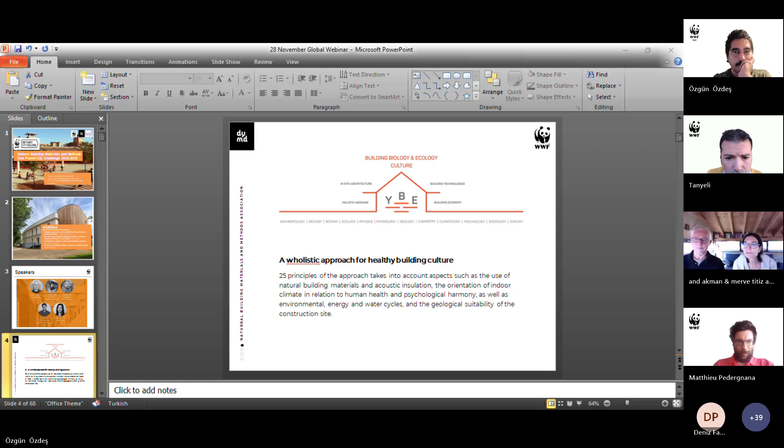Can we go to the next slides? I think we skipped some slides. Just a second, I need to reshare my screen due to a technical problem. So sorry about that. I need to try another plan. No problem. I'm a bit stressed because of the time. For some reason, the Teams... Now it's full screen. Perfect. Okay, nice. Thank you very much. Can we go back 2 slides or one more? One more. I think 2 more. I think slides earlier.

No. We should go backwards. Okay. To the beginning. To the beginning.

Okay, here is okay. So 10 years ago, we founded the institute, but as I said, during our awareness-raising campaigns, we also understood that without natural building materials, we cannot do too much. So we need some kind of a working group. We started in 2018, and we started to meet every month for 3.5 years.

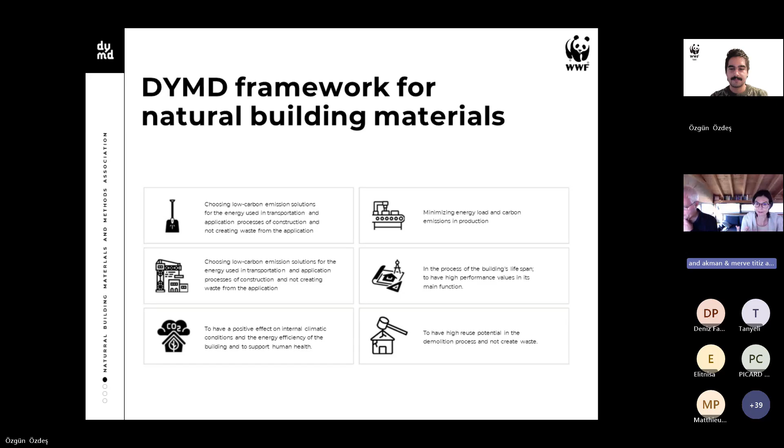And very important also, first, as much as possible, they shouldn't create any waste. But if so, they should be directly turned into another material. Their recyclability should be very high.

Next slide. So the association's main goals are first to develop expertise and know-how, with trainings and workshops. Mostly we choose to create applied workshops, but surely theoretical knowledge is also important, and we should try to spread it. The standards are very important too. Arndt and Matthieu will also talk a bit about it.

Surely our industry on natural building materials is also developing in Turkey, but the standards are important, so we try to disseminate them. For the last 4 years, we now have more than 60 members. We already made 18 webinars, several meetings, workshops and technical trips.

Next slides. Last week we had the Natural Building Biology Forum, and for the third time we are the main partner as the association. It's kind of a meeting point for natural healthy buildings. We have an exhibition which is developing every year. Now we have many prototypes inside.

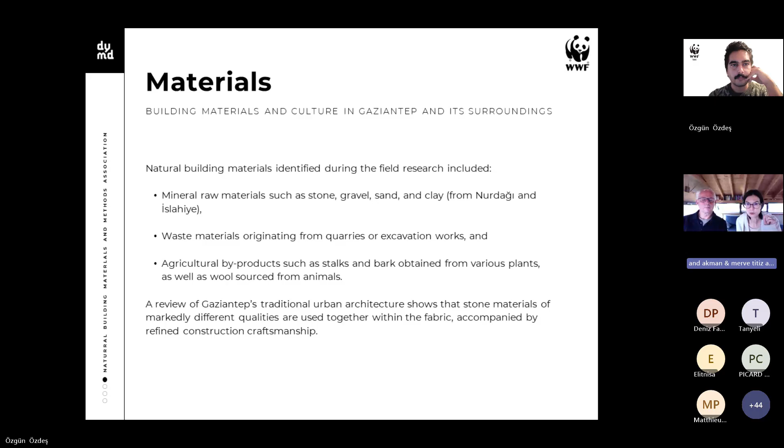Waste materials originating from quarries or excavation sites could be a potential for the area. Agricultural byproducts such as stalks and bark, but also reed marsh near Adıyaman, could be used as raw materials. Also, there were forest areas in Kahramanmaraş and partly in the Hatay region. You can check the report on the WWF website as a PDF. I can also generally talk about some outputs of our report in the next slide.

So especially in our literature review, we try to really ground our argumentation with scientific knowledge and referenced knowledge. And there also we saw, and Arndt will talk more about environmental performance, that natural building materials have minimal, even negative CO2 emissions most of the time, whereas conventional products are significantly higher in this sense. Exploring the local potential of natural building materials and promoting their use will accelerate the sustainable transformation of the built environment, and we think it will enable the creation of disaster-resilient living.

This study also highlights the importance of both industrial production of natural building materials and methods and their inclusion in regulations and zoning plans. But in order to really be integrated more in the regulations, we need more research fields so that the information becomes more regional-centric and more in situ, I would say. So in this context, cooperation with central and local authorities is very, very important.

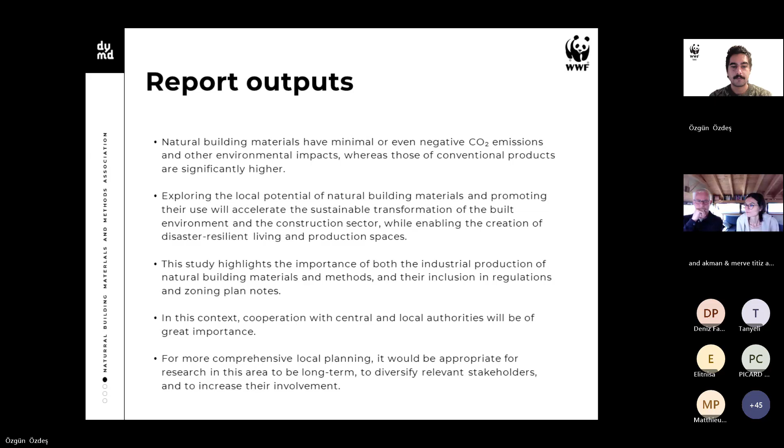So I will go on now with the environmental performance of these natural building materials, and there are some comparisons on this slide and the next slide. We don't have the time to fill you up with 100,000 data points now, so it's more generalized. So first, talking about the low ecological footprint, and the ecological footprint is the CO2 emissions, but also the low embedded energy for producing them.

So you can see here the differences between glulam, lumber, steel, concrete, clay, etc. We could add a lot of other materials, but for example, here you see that steel is very high, but aluminium, also a very much used building material for facades and windows and frames mostly, has on average 3 times higher embedded energy usage in production than steel. So that's very important, and here we see how the natural building materials are at the low level.

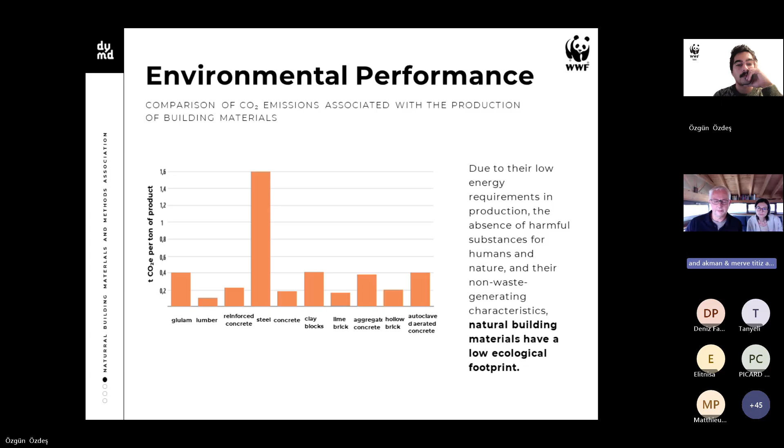Next, please. Thank you. And here again, a comparison between the thickness and the emission. So the red points are the emissions, and XPS or aerogel panels, for example, have more emissions according to their thickness, as we see. Then some are in between, but hemp fiber board and straw bale are important because they are in the minus here. So it's more valuable to have the emissions at a minus level.

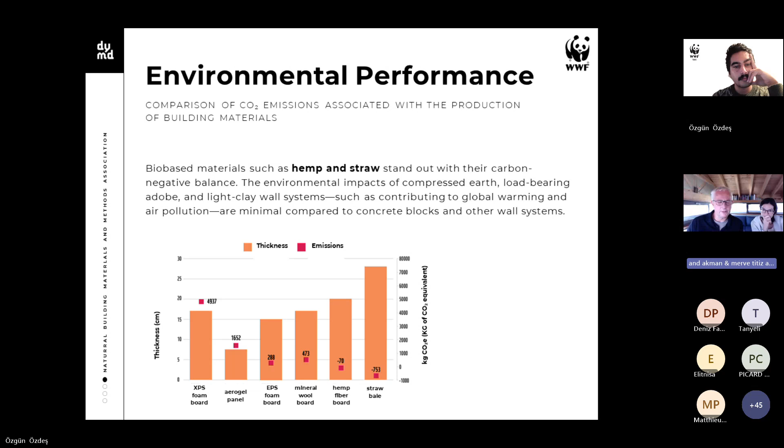Next, please. So talking a bit about the diversity of natural building materials. In the last 15, 10, 5 years, we have had a real rebirth or renaissance of these natural building materials, because they are more and more produced industrially and with standards. So here are some examples, also in the middle, for example, acoustic panels. We can build them with natural building materials, and the raw material is again wood fiber, for example, or we can use waste paper, things like that.

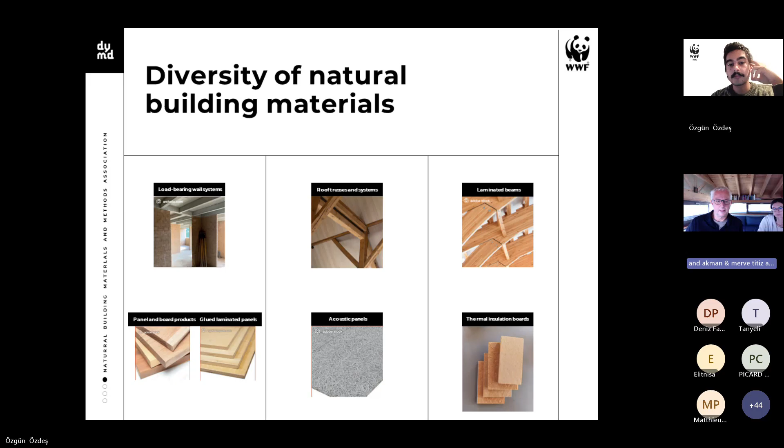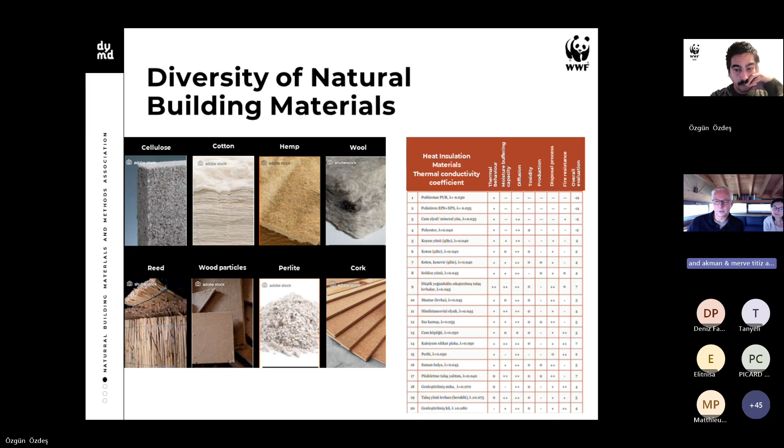Also here, reed on the left side, thank you, is the insulation material which uses the lowest energy to produce. And for that, we have very big potential in Turkey, for example, to produce reed, and it can be turned into a big economy also. Next, please. Thank you.

So there are rammed earth walls. Rammed earth walls are not coming from tradition, because we need very strong mold plates, which we didn't have in the past, but now we have them. And we have the technology to compress them. So that's why rammed earth technology is growing more and more.

Clay plasters, clay panels or clay paints are produced in Europe, also in France, but more and more also in Turkey now. And the Natural Building Materials and Methods Association is in cooperation with these startup producers, also on standards, so that they can develop their products close to, let's say, European standards.

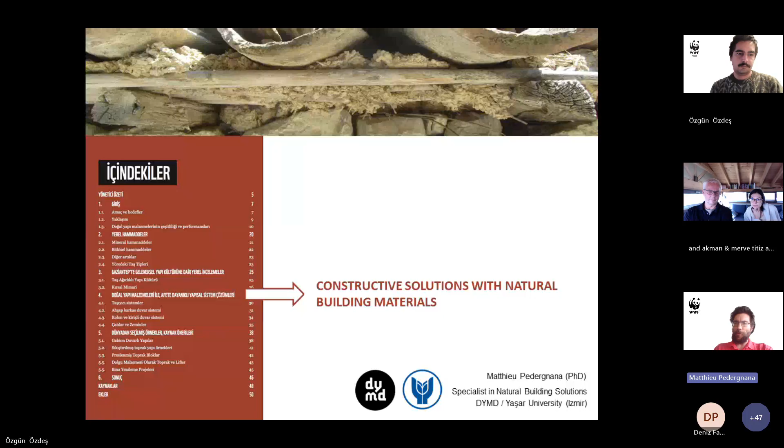The system and the work we identified were especially for structures in rural areas, not in cities, and therefore all the systems we identified were based on timber structure and not using any kind of reinforced concrete structure. However, all the solutions we are presenting would be suitable for it. So first, please, next slide, it was good.

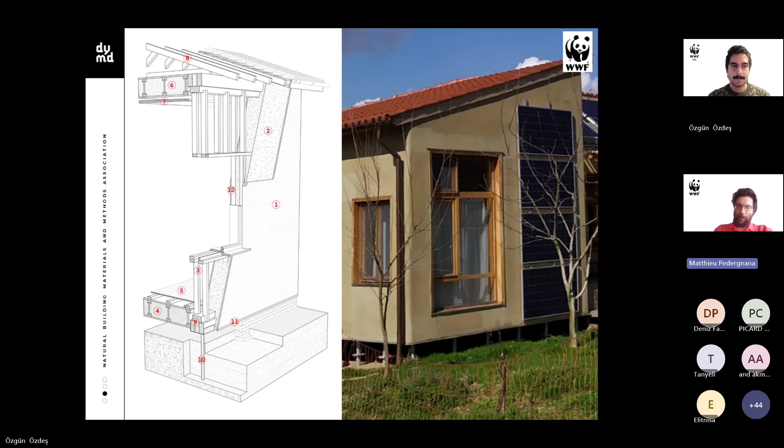I just wanted to show some examples of already existing buildings in Turkey that are using these materials, and we were inspired by those existing structures like this, a farm in the Tekirdağ region, in the northern region of Turkey, that is built out of light clay, a timber frame structure, and a light clay material that is creating a wall incorporating the timber structure, so creating a full insulation all around the building.

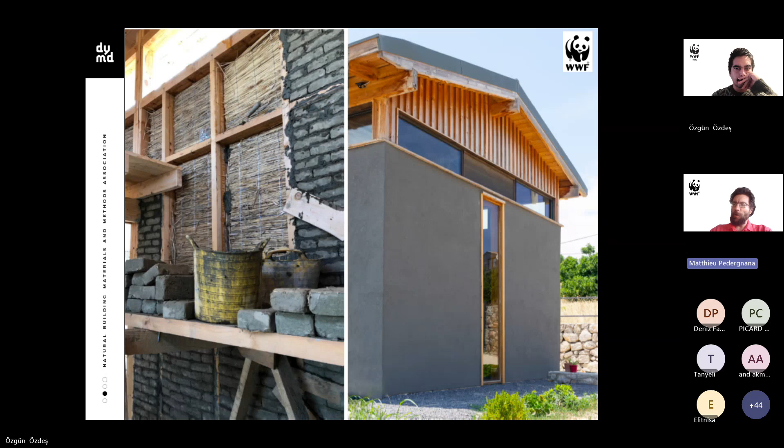Next slide, please. Or here, another building based again on a timber frame structure, but a totally different constructive solution where both insulating elements, such as clay panels and reed panels that we can see on the left side of the picture, and mud bricks are placed together in the timber frame, therefore both acting as insulation and thermal mass to regulate the temperature inside the building. This building is in a hotter region near Izmir. Please, next slide.

So the materials we identified that could be used are here, and we also have seen how they could be used. So not only the material itself, but the building technique and the system, and in which ways they could contribute to create a resilient building. And we evaluated, according to the literature and experience, their seismic resistance, flood resistance, fire resistance, or heat or cold wave resistance. That's this work.

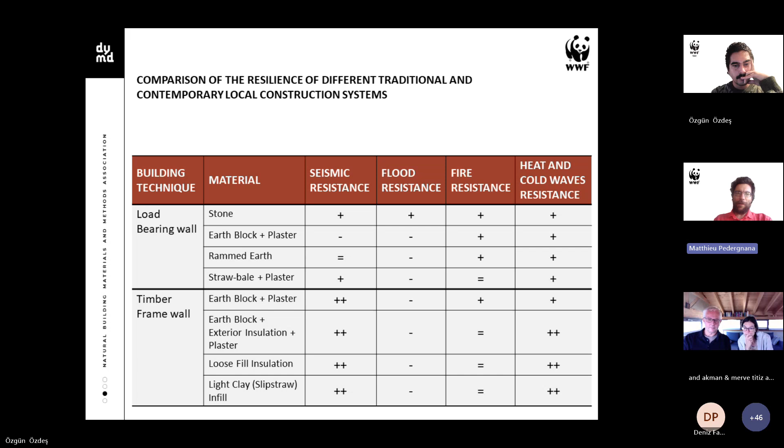And then for the work we presented, we decided to only work on timber framed walls, as most of the time, due to earthquake regulation, load-bearing walls are not allowed in Turkey anyway. Please, next slide.

So here you can see some 3D views of three types of timber frame wall with three different types of insulation. So it could be walls using heavy materials such as mud bricks or compressed blocks as an infill material, and it is especially suitable for buildings in a very hot region, as it was in Gaziantep.

But of course, the climate is not always the same, and the earthquake area was not only Gaziantep, it was also mountain areas with a much colder climate, and therefore we also identified solutions based on more insulating material, as solutions 2A and 2B. Those solutions are based on using more insulating material, less mass, especially on the exterior wall, and therefore creating a very good insulating skin all around the building.

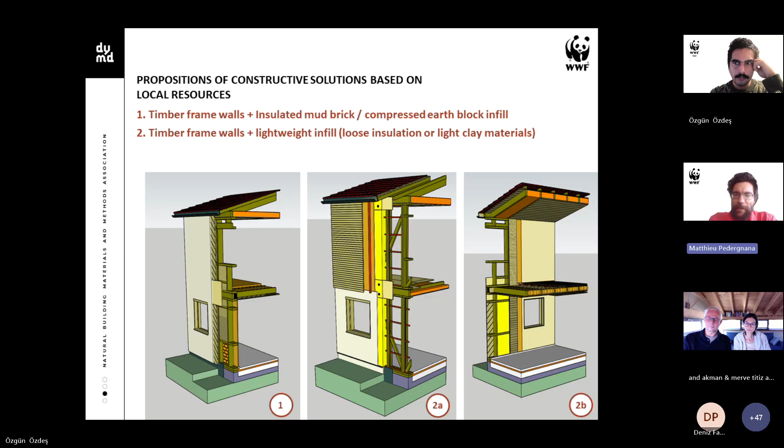So next slide, please. So here you can see in more detail the solution based on mud bricks. So the idea is, as we saw in the second picture of my presentation, to use a timber frame, and inside the timber frame to use insulating materials such as reed mats, and on the front of it place mud bricks. So it prevents the heat from entering the building, but at the same time we keep a high thermal mass, regulating the temperature and the humidity due to the quality of earth blocks.

This timber frame also needs additional elements in case of earthquake, and that's where you can see, from number 4, we have to add exterior panels or exterior bracing boards to prevent deformation in case of earthquake. So all these buildings and proposals are, of course, just possibilities. All of them need to be calculated. The dimensions of the timbers and insulation need to be calculated by an engineer according to local conditions. But these are possibilities to build, giving an idea of what can be done according to Turkish regulation.

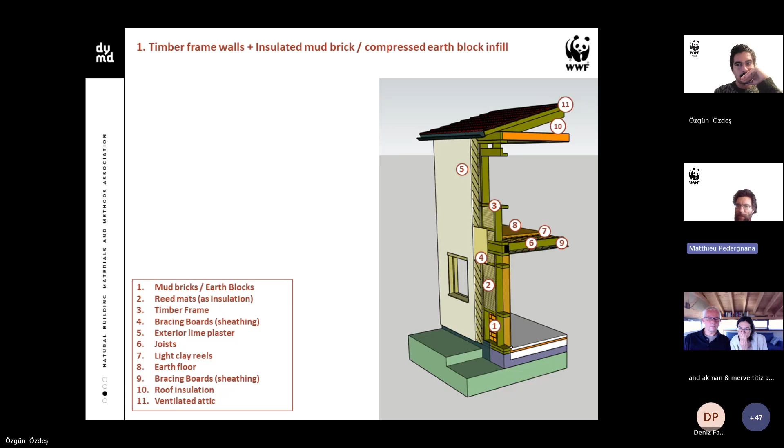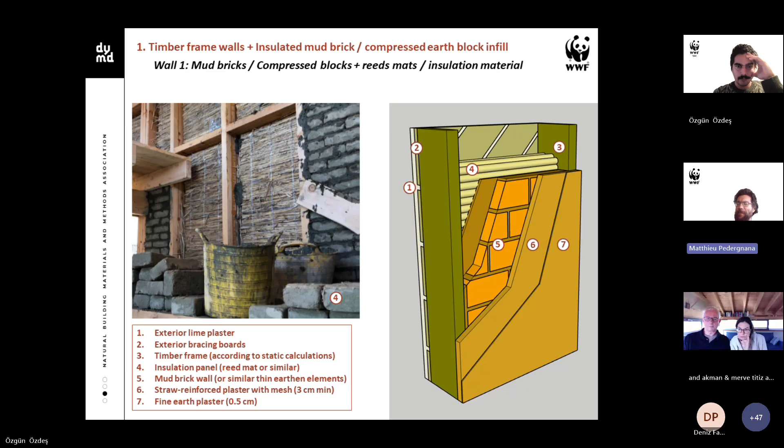Please, next slide. So here you can see the different possibilities while using heavy material inside the wall and having a lot of thermal mass. What I mean by thermal mass, for those who don't know, is using a heavy material, mostly earth, but it might also be stone. This material allows regulating the temperature by accumulating energy and preventing overheating inside the building. Therefore, this mass should not be in contact with any other heat source during the summer.

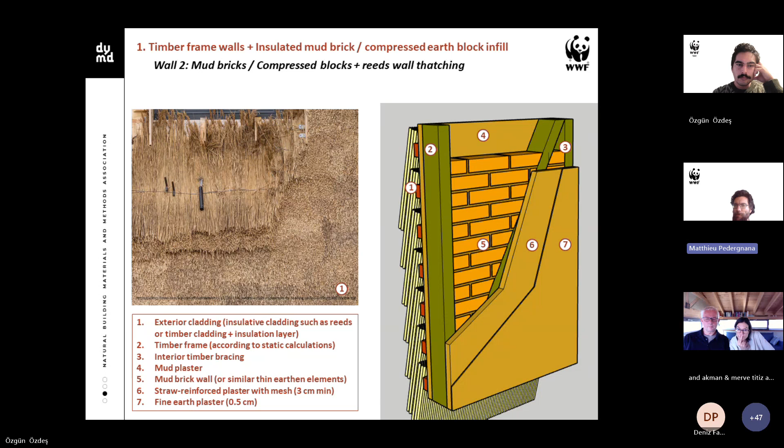Please, next slide. Another solution is to use reeds, not inside the frame, but as a cladding, as it has traditionally been used as a roofing material in several regions of Turkey or Europe, but now new techniques allow using these reeds as a cladding material. It's a waterproof material, and due to its thickness, it makes a very good insulation material. Please, next slide.

Or, of course, to keep bigger thermal mass, the reed panel can be used on the exterior of the frame, and then it also helps to support and hold the plaster, because it is a very good surface for it.

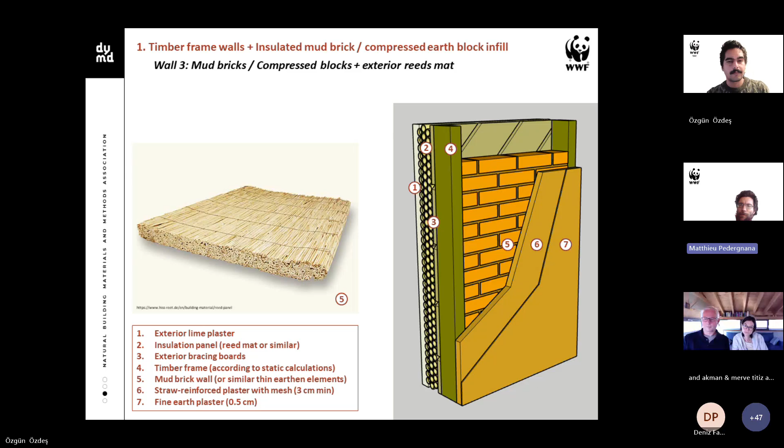Not only do we need to work on the systems that make the wall, but floors are extremely important, floors and roof. Here I'm presenting a technique called in English reels of earth, basically a mix of straw and earth used as some kind of sausages, placed in the roof or in the floor to add more mass. It has a disadvantage of adding mass to the building, but a very good advantage in that it can be used as heat insulation, sound insulation, and for storing heat to prevent overheating.

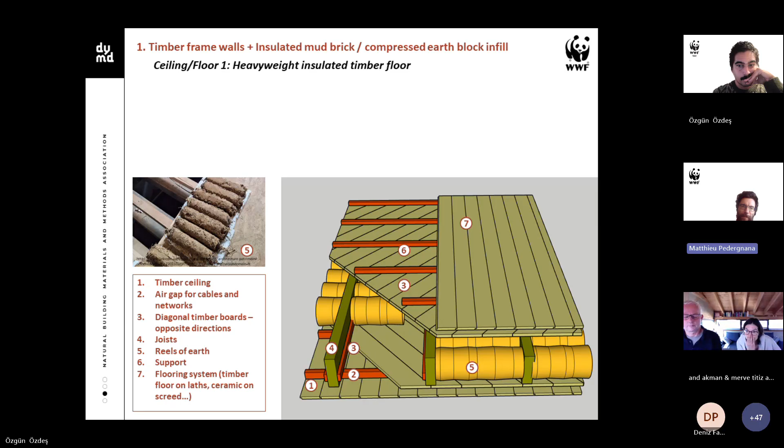Please, next slide. So here you can see the second type of technique. Number one is light clay, a material made out of a lot of fiber, using the clay, the earth, only as a binder. This kind of technique allows for very good distributed insulation all around the building. Here it's only used in the wall, but it can also be used as roof insulation in some cases. Please, next slide.

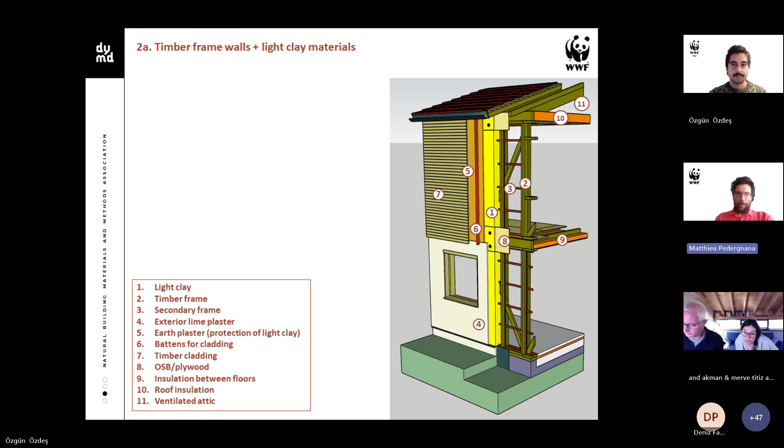While using this technique, because it is implemented directly on site, the bracing system can be integrated into the structure, coming back to a more conventional timber structure that carpenters know how to build traditionally. Light clay material can be made with a lot of different fibers. As you can see in the picture, this is an experiment with small buildings made with pine needles as fiber and a little bit of clay just to bind everything together. But a lot of other fibers have been experimented with, and from research I led at the university, at Yaşar University, the type of fiber doesn't impact the properties of the light clay, so there is no fiber that is better. This is a technique that can be very good because it can be implemented with whatever waste fiber, agricultural waste fiber, is available around.

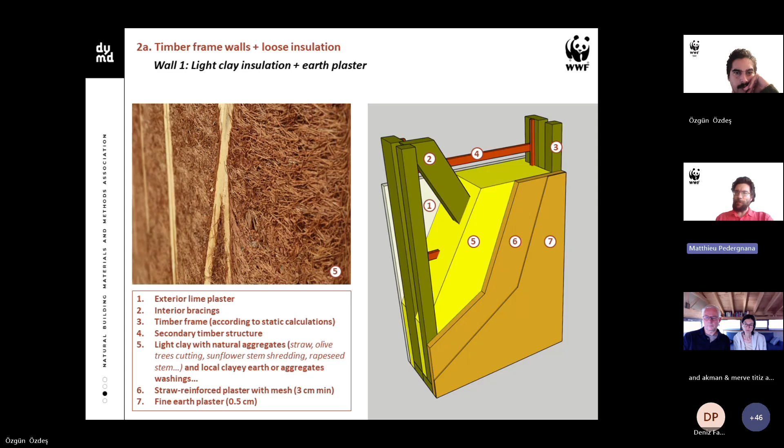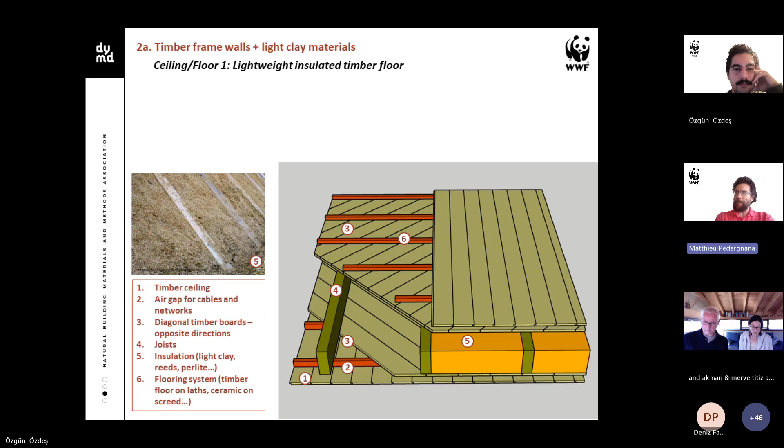Please, next slide. So again, here you can see in the floor, insulation can be poured in between the floor joists, since it will be closed on the bottom and on top using diagonal boards or plywood or any very resistant material. This creates boxes, and so any type of insulation can be poured in, such as light clay, reed pieces, or rice husk pieces, depending again on the availability of agricultural waste. Next slide.

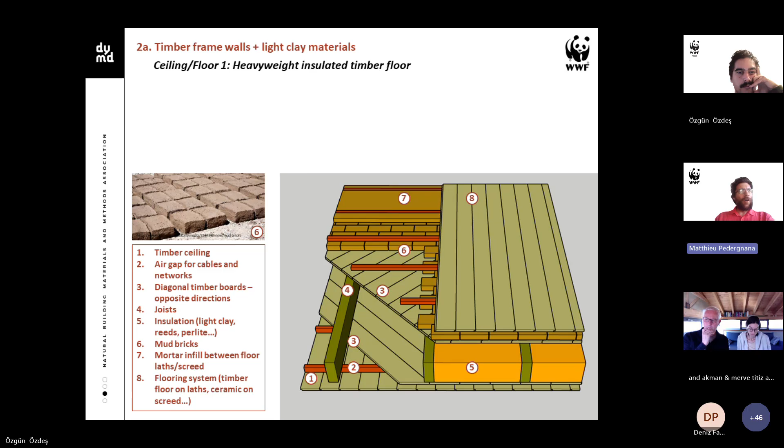In some cases, it can be important to add a bit of weight to the floor, for sound insulation or fire protection issues, and in this case mud bricks and earth floor can be used. Please, next slide.

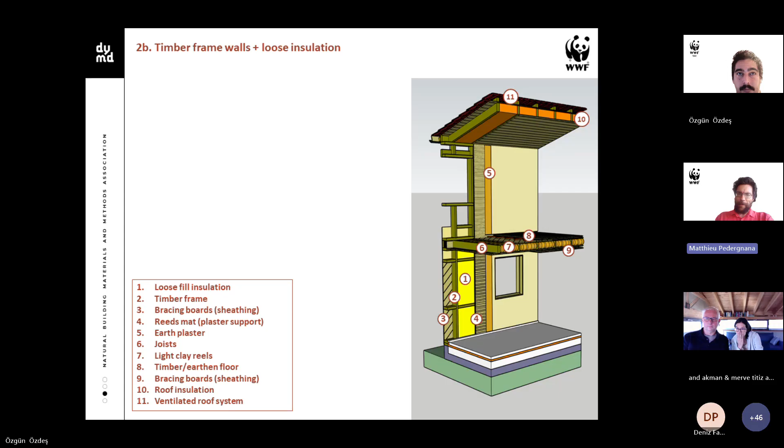A third technique, even more insulating, would be to use the same type of timber frame wall, but use what we call loose fill insulation, not based on material put together with a binder, but by closing both sides of the wall and filling with different types of very finely shredded material. Next slide, please.

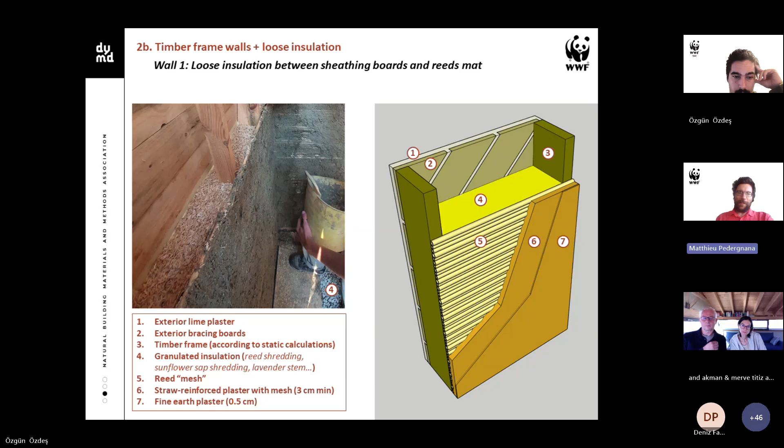Reeds can be used in exactly the same way, so in this case there's no need for an additional reed mat. Reeds, as a mat or as reed shreddings, can be added inside the frame as fill insulation. Please, next slide.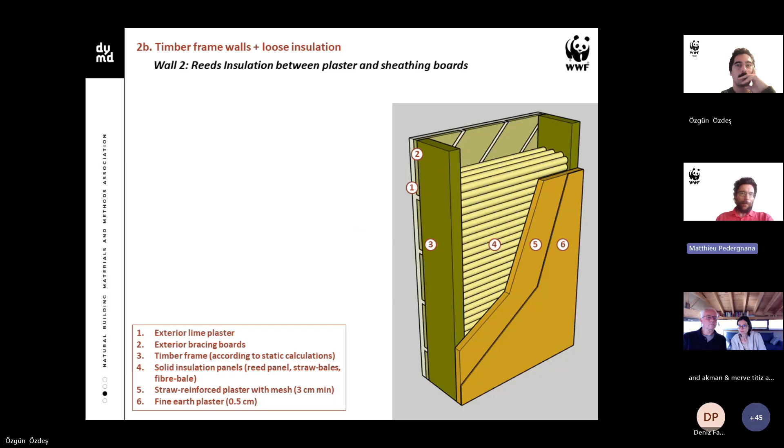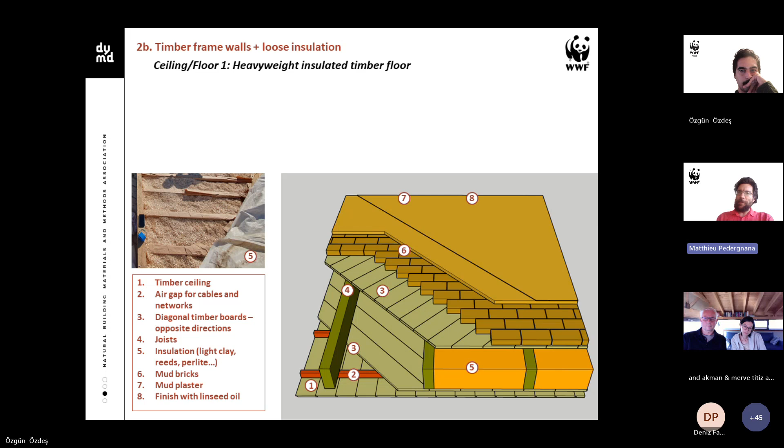These were solutions for building in rural areas, low-rise buildings, one or two stories, according to the regulations available. However, in Europe and elsewhere in the world, where there is less earthquake risk or where regulations are adapted, those materials are already used for very high-rise buildings, up to 18 stories in South Africa, for example, and in dense areas.

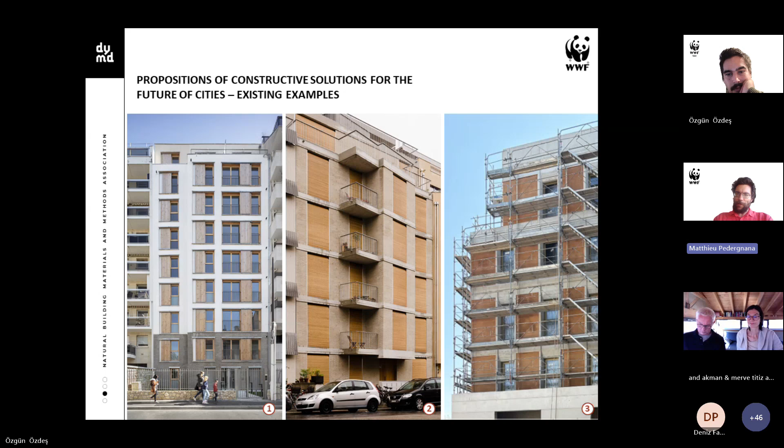So here you can see different pictures. Picture one is near Paris, a hempcrete building. I chose all the examples to be reinforced concrete buildings, as is usually the case in Turkey, but the infill, the wall infill, the facade, is made with natural material. The first one is hempcrete, a mix of hemp shives, hemp dust, and lime. The second building is made with mud brick, compressed earth block as a facade system. The third building has straw bales placed between the reinforced concrete columns, and the straw bales are plastered with lime and earth.

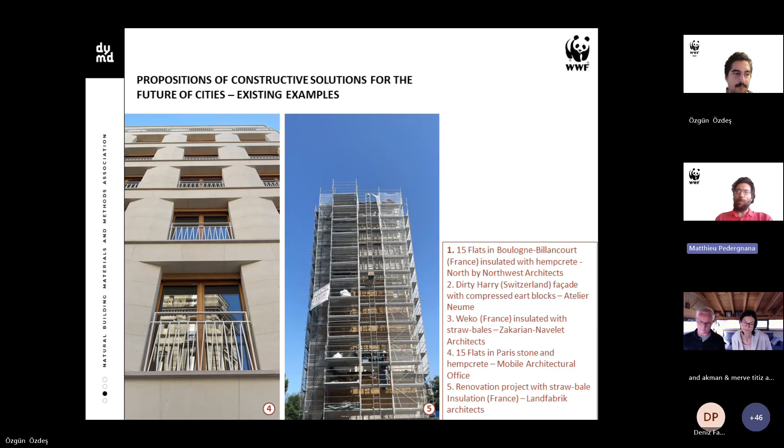Number 4 is a stone building in Paris, but the stone facade is also insulated with hempcrete. Number 5 shows that not only new buildings can use natural building material, but also renovation projects. This is a renovation project in France, near Grenoble, where straw bales are used as exterior insulation and placed above the existing material of the building facade.

Thanks a lot, and now I will let Charlotte explain her work directly, how as an architect with the municipality of Rosny-sous-Bois they are working and producing experimental buildings. Thanks a lot for all.

Thank you, Mathieu. Thank you, Merve, and I will take it from there. I see there's about 20 minutes left, so I'm going to be extra fast in my presentation and try to be clear. I'm Charlotte, an architect. I've been working for the last 9 years in Rosny-sous-Bois, a suburban town near Paris. Bois means forest, but there's no forest there.

Since Merve and Mathieu gave a very strong background explaining why and how we could use natural materials, I will be fast on the subjects and talk straight about our buildings.

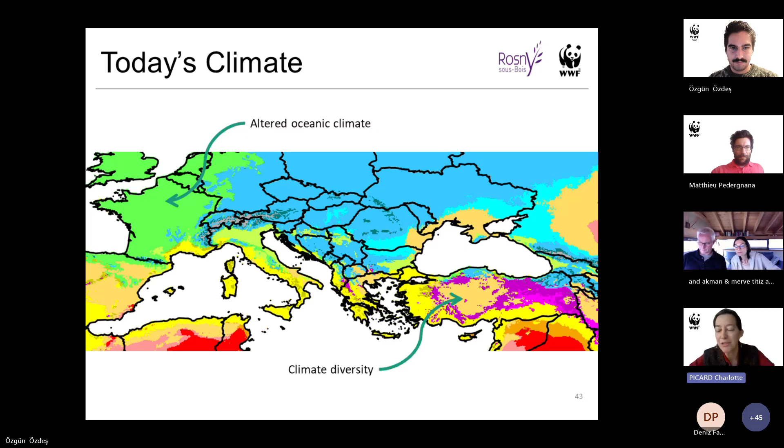We can go to the next slide. Quick reminder that we have very different climates, France and Turkey, so obviously the designs I'm going to show you are responding to our particular climate. And we have no or very little seismic activity, so our buildings will be different in that effect. Yes, we expect, as everybody else, a temperature rise, and that's what we have in mind when we design our buildings.

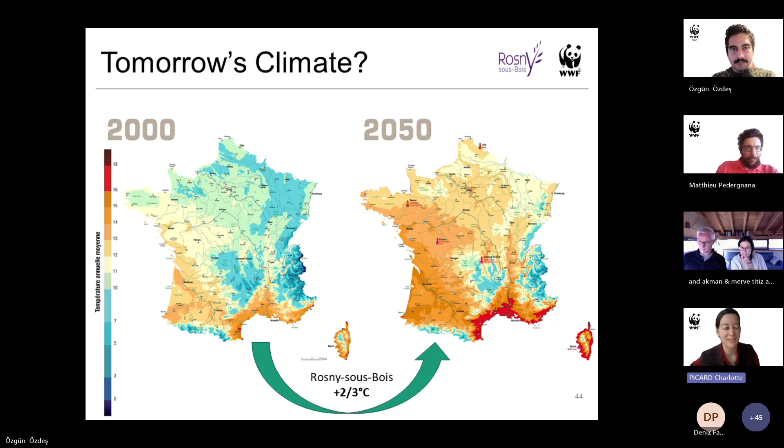So next slide, we'll slowly approach the projects. I just wanted to say that it's very specific for a city to have a dedicated team to work on the subject of adapting our cities to climatic and social changes. We have multiple skilled teams with architects, engineers, structural engineers, but also heat and ventilation engineers, and we also have a forest expert at the moment.

Next slide. We've been working on what we call ecosystemic design for the last 10 years. As civil servants, we must question every choice, every action that we do every day. We are responsible for preserving the common good, and therefore we have to make sure that every choice we make will not have a negative impact on the environment and more globally on the planet, because we want our town's inhabitants and everybody else to keep on living in a dignified way.

Next slide. In France, it's the towns that have to take charge of constructing primary schools, and then we put it at the disposal of the Ministry of National Education. So what happened in Rosny is that we had an increase in demography, more children, and not enough classrooms. That's why our team has been working specifically on building new school buildings for the last 10 years.

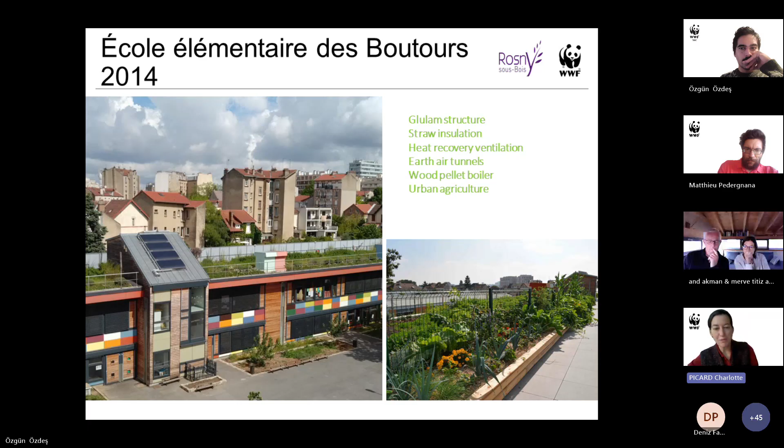If you want to go to the next slide. Yes, and from that starting point, we tried with every project to understand better agriculture and forestry, so we could really know where the natural materials came from, and if the agriculture or forestry they came from was also having a positive impact on the ecosystems.

The first project, we found out that the wood was probably grown in Scandinavia and then transformed in Austria, and then it arrived in France with trucks. So we decided there was too much embodied energy and we couldn't go on like that. Choosing to build with timber and straw is good, but it's not good enough. You really have to know where the materials are coming from.

For that second school, we started meeting with carpenters to find out where they got their own supply, and we asked them if they were ready to put the straw insulation themselves in the building, and it's not always easy. People have their way of doing stuff, and they don't really want to change most of the time. So then we had to meet other contractors that were willing to work with the straw, and we paired them. We found a carpenter and a straw insulator, and we got them to work together.

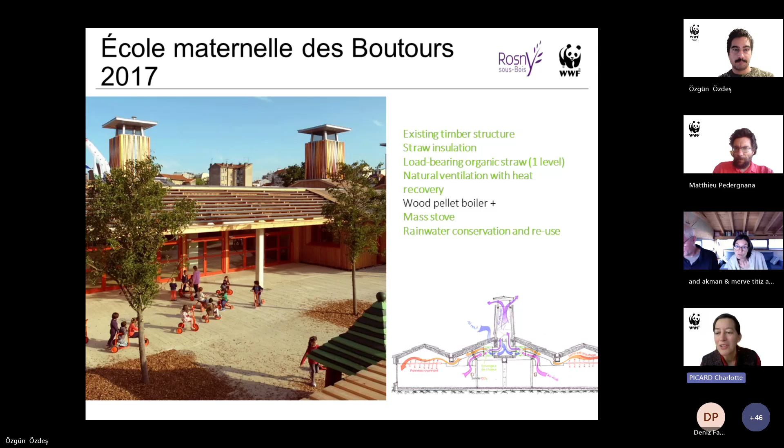For every school, there's loads of research being made, and I'm not going to talk in too much detail about each one. I should say that for this one we started our research on natural ventilation. It's not exactly the subject for today, but it's important for us that the schools are easy to maintain, that even I can work and know how to clean the system, or what should be done, so the city is more resilient with their new buildings.

What we realized as well, and we're still working on that, is that the building cannot answer all our needs. It might become impossible to be warm enough in the winter or cool enough in the summer. So we have to work first on our own bodies.

That's why we met with the local knitters club, and we made a deal with them. We gave them knitting wool, and they made those sleeveless vests that were available for the children. That's the way to tell everybody the story that we need, first of all, a cultural change if we really want to have an evolution in society and an evolution of how we deal with those new climatic conditions.

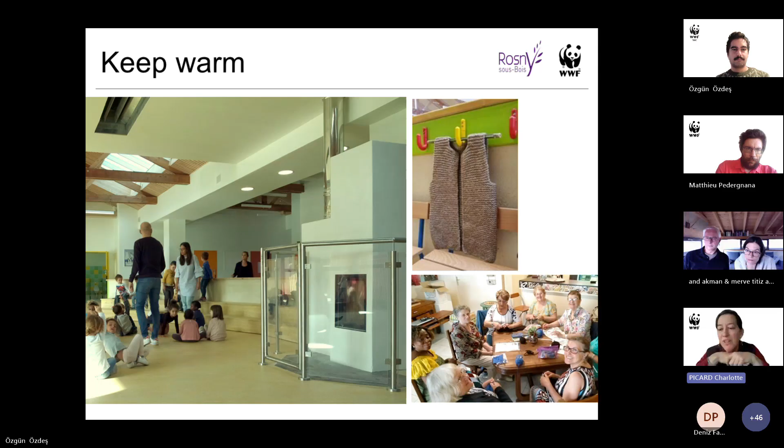What we did too, and you see a picture of it, is we started to install a mass stove, because we realized that if there's an electricity shortage, any heating system just stops working. Whereas with a mass stove, you just put your wood logs in it and start the fire, and at least you can warm up one central zone in the school. We started thinking about our buildings as refuges as well. If there's really a problem, an electricity shortage, at least we can gather children, even adults, in our schools and keep them warm in the winter.

We also built — this is not exactly a school — a building that children will go to before school, after school, during the holidays, and during days where there's no school activities. This one is very specific because we had the opportunity to do many researches on this one.

With the load-bearing straw walls, I'll get back to that, but also we continued using that natural ventilation with heat recovery system that we designed. We've done some seasonal heat storage, which is a bit complicated but interesting — how you load up calories from the solar energy into a huge tank filled with water and reuse those calories to heat up the building for part of the winter.

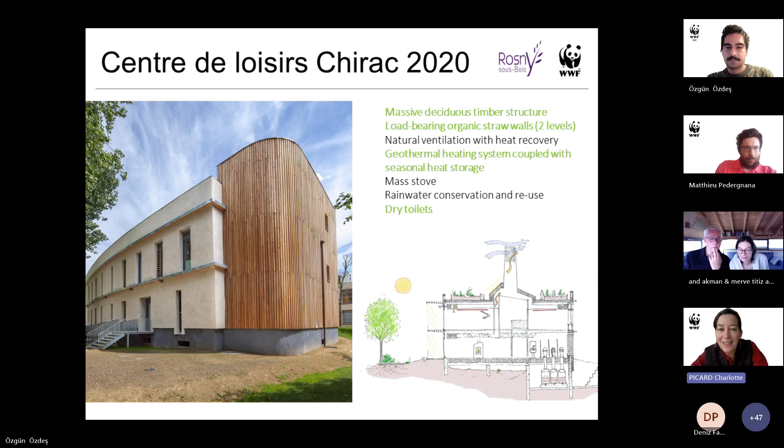Just a quick reminder that load-bearing straw walls exist since the late 19th century. It's been developed mostly in the central plains of the United States of America, where they had very little construction materials. When the straw baler was invented, they realized they could just stack up straw bales, just like bricks in a way. With a rendering on the inside and outside, the building would stay there. There are still buildings built in the late 19th century that exist today.

We have the idea that by using straw as a load-bearing material, we use less wood, because timber in a way is a very good material, but it takes many years to grow, and it's a very finite resource, whereas straw grows every year. So in France, we have no shortage of straw. We were able to build that 2-story building with all the external walls made of those load-bearing straw walls. We made prototypes and fire tests, and everything worked fine. So the building was constructed.

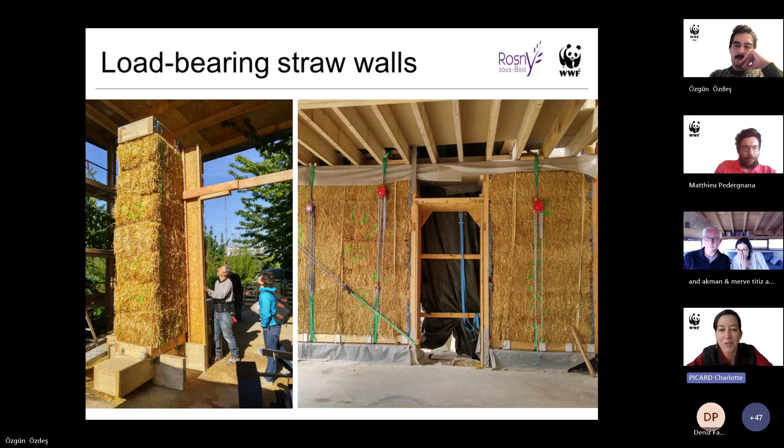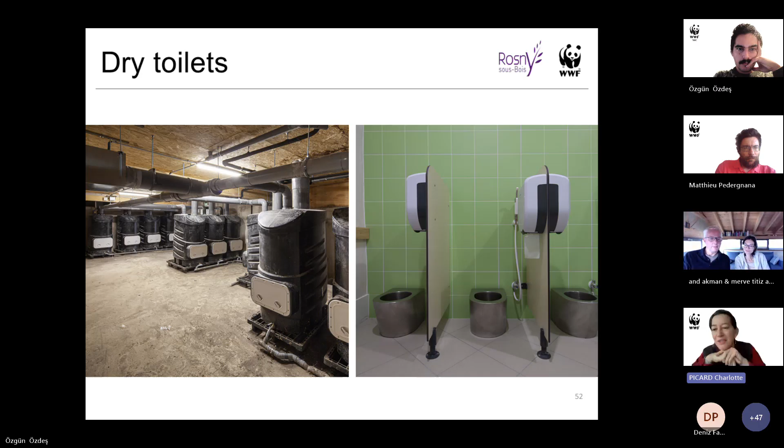Just a quick word on water, which is also a resource that questions us a lot, and we think that drinkable water should not be used to flush toilets. It's just such a waste. So we've implemented dry toilets in 2 of our buildings. The idea as well is to use the urine as fertilizer, like it was done before we invented industrial fertilizers. This way we can make a cycle from our building and the field of the farmers who then give us straw to insulate the next building.

Very important for us as well is to invite as many people as possible during our construction sites to make various workshops. We've done a lot of workshops with raw earth bricks, with mud bricks, because it's a very easy technique that even children can participate in. That gives us the opportunity to explain why we should use those materials, how they're good for our health, for the planet, and how you can use your own hands to build. It's not necessarily that you need a contractor—you can actually do a lot by yourself, and it gives people a lot of hope knowing they can do stuff themselves.

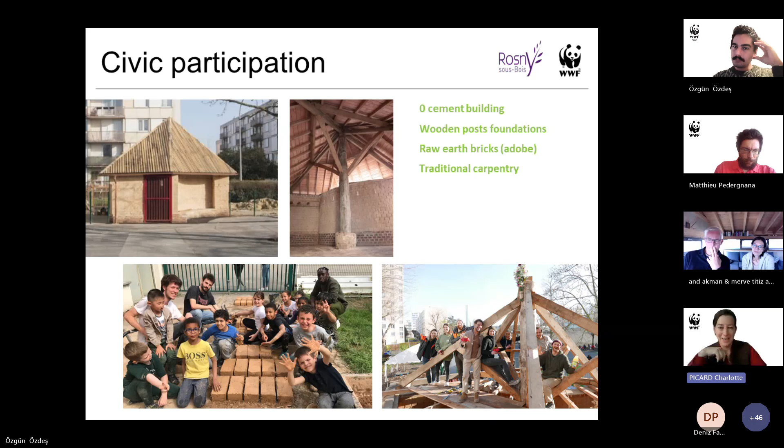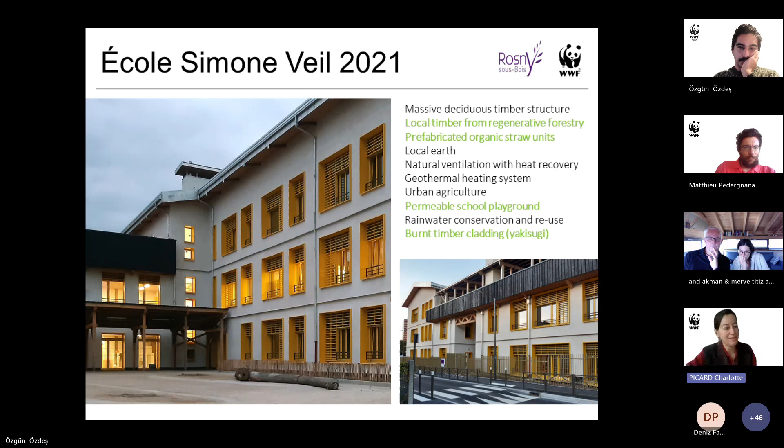We found a contractor close to Rosny, about 10 kilometers away, who had enough space to make a prefabrication workshop especially for this building. It's very simple: the outside walls are made of timber structures, units, filled with straw bales in the workshop. The inside rendering made of earth is also made in the workshop, and then we just had to carry all those units to the building site. You can see part of the structure on the right-hand side.

I didn't pinpoint it, but all our structure in wood is made of massive local wood, mainly deciduous wood like oak or chestnut. The structure is on the inside, and the prefabricated units make up all the external walls. So that was really effective.

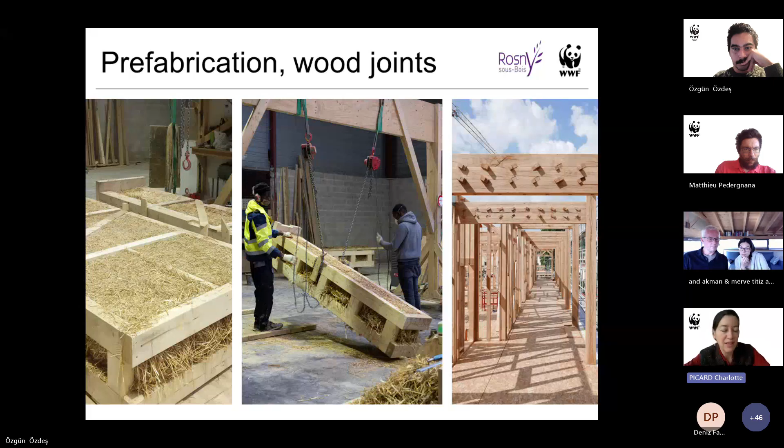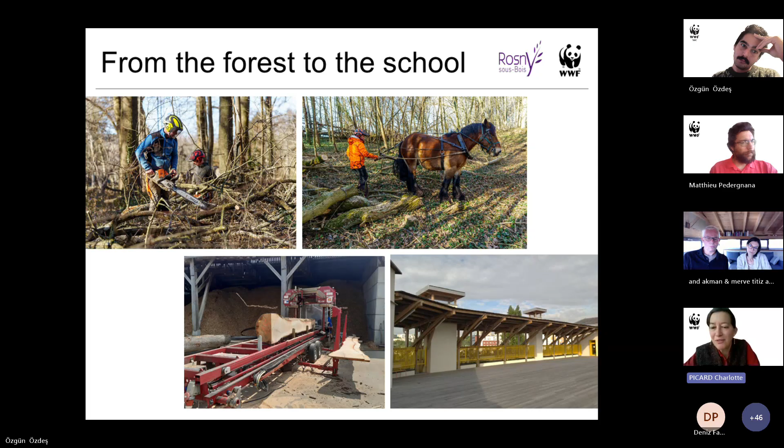We also did an experimentation from the forest to the school on that project, where the town bought wood from a nearby forest and we sawed it with a portable sawmill. So the wood had very little distance to travel—only about 80 kilometers—before being used on the school. Since the wood was not completely dry, we only used it for external structure, as you can see on the canopies on the playground.

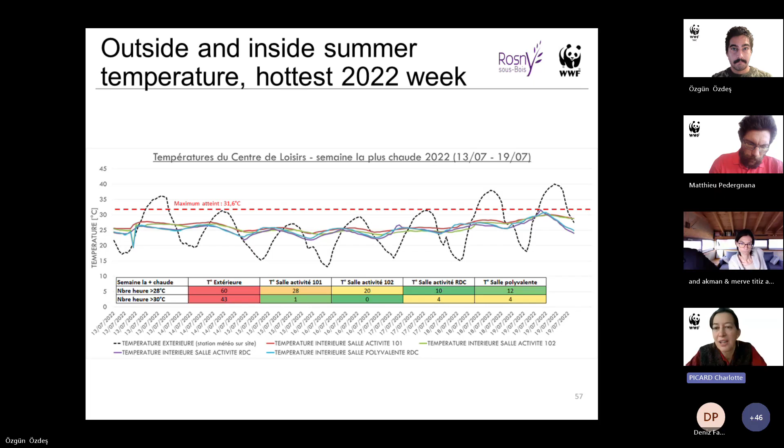I have very little data to share, but after completing all the projects you've already seen, we did a survey to see how the building performed, how the inside temperature compared with the outside temperature. In the summer of 2022, we monitored one of our buildings for the whole summer, and this is the hottest week of that summer. The inside temperature is always around 25 degrees, even though the maximum outside temperature sometimes reaches as high as 40 degrees. So without any air conditioning, our buildings are holding up very well for the moment, even during very hot summers. It's the same for the whole summer.

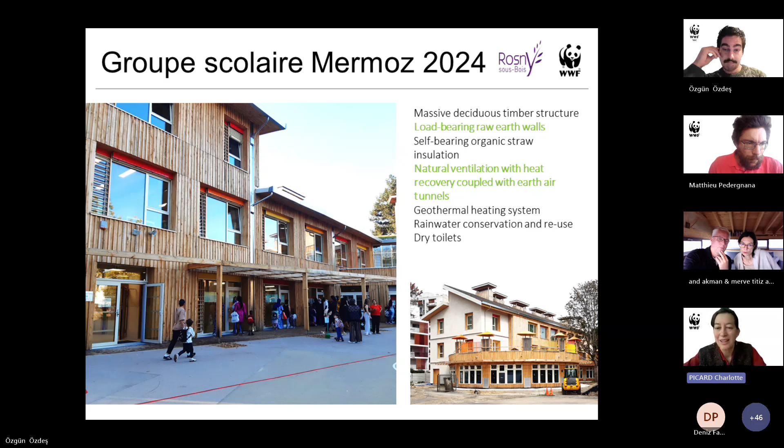For this project, we did specific research on raw earth. Raw earth is a bit complicated for us because it's very useful as a render on straw—it works very well—but at the same time it's not a very local resource for us, because in Paris and the suburbs the earth is polluted. So it's complicated to use polluted earth inside a school. We use it because it's very good for adding inertia to our buildings and helping them stay cool in the summer.

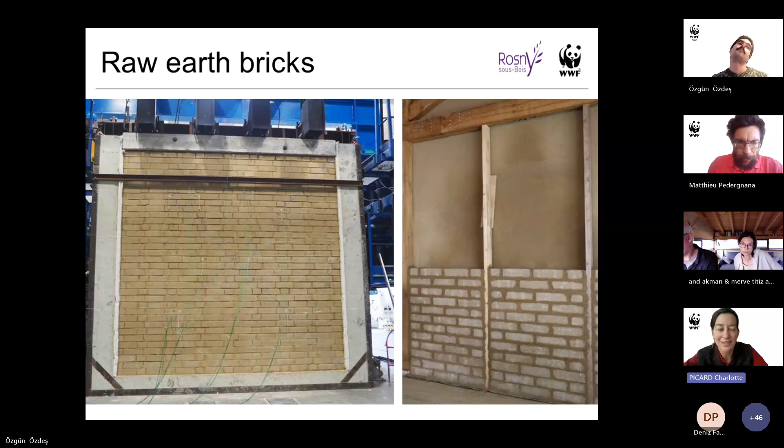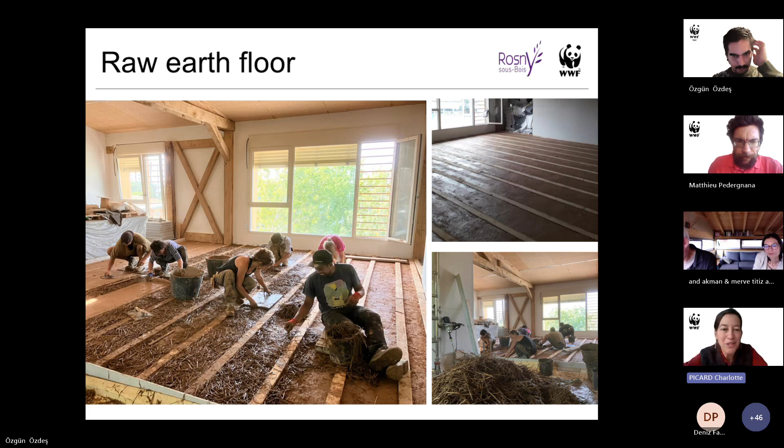On this one, we did research on load-bearing raw earth walls, and also did the internal lining to add more inertia to the buildings. We tried an open workshop as well, where people could come and fill our wooden floor with earth and straw.

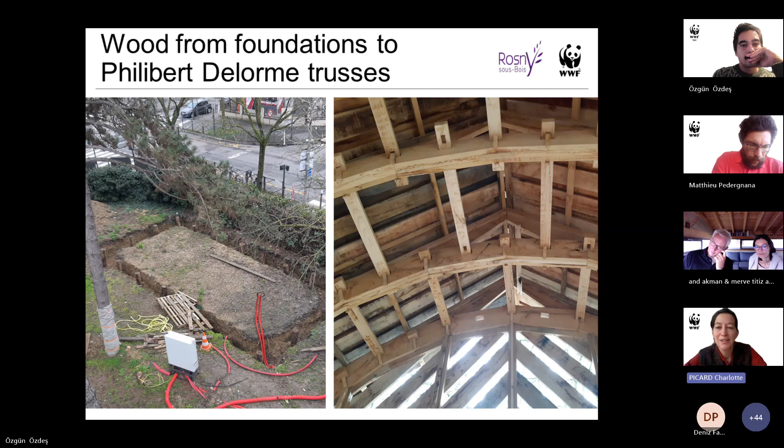And that's an illustration of how you can use all kinds of wood—you don't need to wait for 100-year-old oak to build a structure. You can use very small sections, and there are tons of different ways to make those trusses. This one is a Delorme truss used with very small sections. I'm getting near the end.

Quickly, we've also worked on renovating a 1960s school. It's a concrete building, very simple, so a lot of energy consumption in the winter and too hot in the summer. And we've made a very nice straw coat that we put all around the existing building, and we've added as well our natural ventilation system.

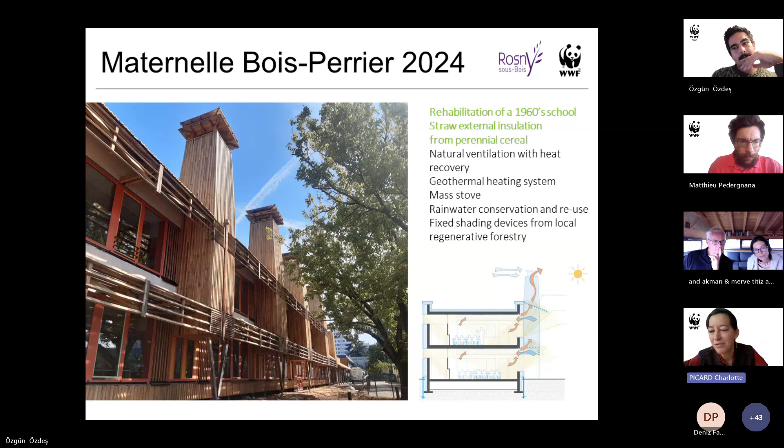And the research, next slide, for that last project was very specific on perennial cereals. We've decided that there was a way to use straw with even less embodied energy than the usual organic wheat straw that we've used previously. And we've worked with the Land Institute that is in Kansas in the USA. And they have research all over the world, and even in France with the Institute of Agriculture in the Rhône-Alpes region.

And we were able to test that straw with Thinopyrum intermedium and to realize it would work just as well. And it's a cereal that grows for 3, 4, 5 years in a row without the need of going in the field and using the tractors every year. So there's much less petrol used, and we're really happy that it works fine. And we are planning to keep on using it for the next projects.

And finally, just a quick word to say that we're very happy to do schools because it gives us the opportunity to work with children. And it's important, they're the future, and they learn very quickly, not like us adults who sometimes have difficulties imagining a future. Thank you very much.

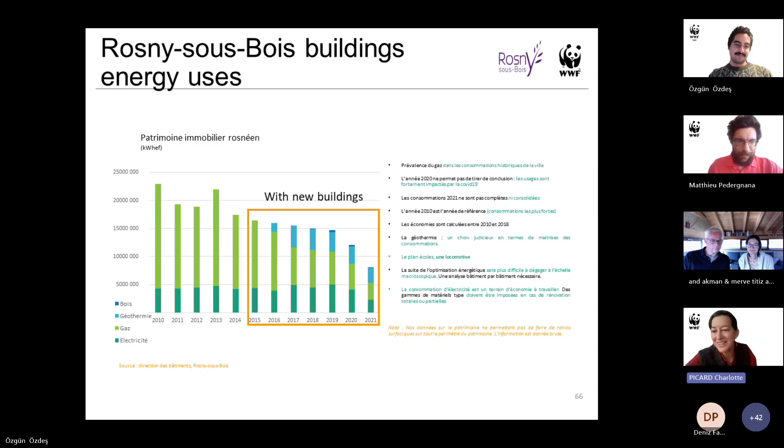Thank you very much, Charlotte, and all our speakers. It is very fascinating to see how nature actually can help us in our fight against climate change. I was also amazed to see in your work in Rosny-sous-Bois how to include the communities in your work and increase the awareness in this context.